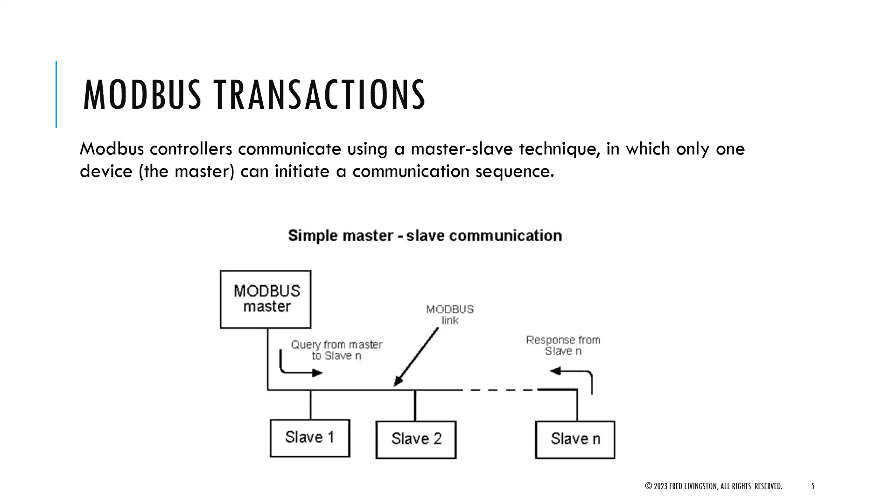And so the Modbus: single master, multiple slaves, and they have a fixed packet. You have the address, you have the function code. The function code, remember, does the read and the write. You can do read registers, write registers. Those are the different functions they have. Then you have your data itself, and all of these have error CRC bits to know that the data you sent didn't get corrupted over the network. So that's one advantage. And then an acknowledgement packet is always sent back corresponding to the query. So the query and response should have some of the similar data coming back.

In the labs, you discovered there are certain registers where these go. So if you add booleans, which is the single coil, they start with address 000 and then append from 1, 2, 3, and 4. And that's how you were able to set the inputs and outputs.

If you want to turn on a motor or stop a motor or look at a sensor IO, just a single boolean value if it's on or off, true or false, you can use the input coil there, and you could say force this thing on or force this off. But it's only a single bit. If you want to send more rich information, such as a string, a time, a status, you need to convert it to a 16-bit number.

And we talked about the conversion, and that allows you to send more rich information back and forth. And they're going to start at a different address though. They're going to start with the 3000s for integers and 4000 for the floating point numbers. But they're still 16-bit numbers, and you will have to typecast that into the correct format to actually use it.

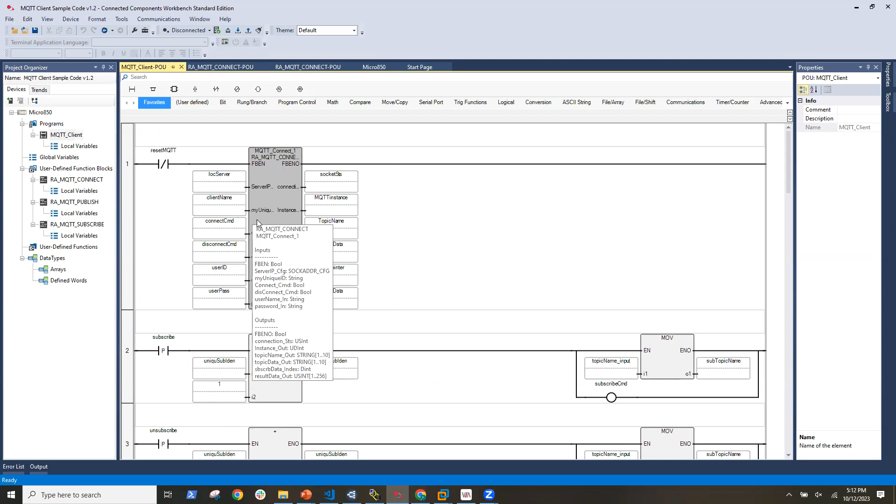Here is that enable. And I have global variables here for a lot of these inputs and outputs. So I could set these here. It's either local or global variables. I think they are pretty much all local in this case. And this is where I'm going to set some information here. And you need to set this before you actually connect to the device here.

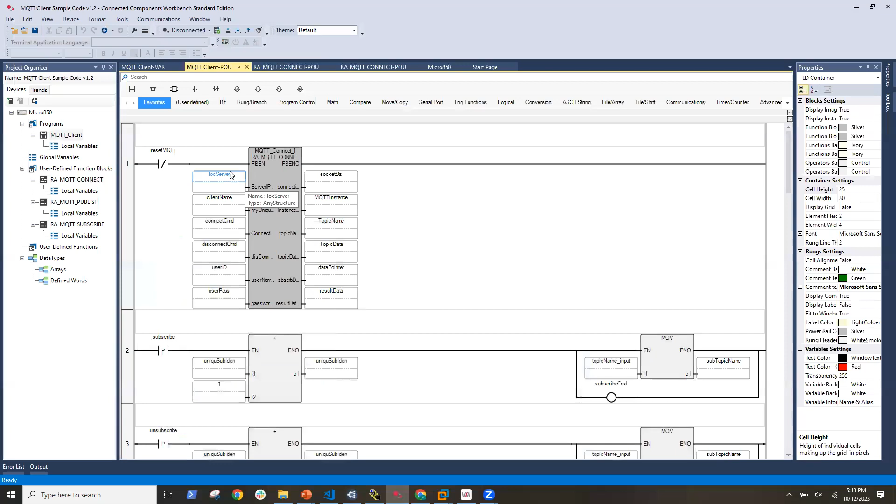So the first important thing that I had in red was we need to make sure the IP address is set to the broker, and we need to have this username that's kind of unique there. So this local server and this client name is set here and here. I want to be able to set this local variable to that. So that is a local server, which should be here. And you can see here's the port. We're going to use the default port. But this is where I need to set the IP address to my broker.

And if you don't know your IP to the broker, I just use a ping to figure that out. So if I want to connect to the test Mosquitto, is it Q-I-T-T-O? And I could ping it, and I can see it is 91.121. And that's what I want to put in here for my initial value. So this is 91.121.93.94. And it will change. It's not a static IP address. It probably changes every day or something. So it happens to be right. I just connected before coming down here today.

And I also want to have a unique client name. So we'll find that here, and you want to change that to whatever your client name is. As long as everyone's not using the same name, you will be okay here. So I just added some random numbers here to do that. And save this project. And I'm just going to connect to the PLC and upload it like normal.

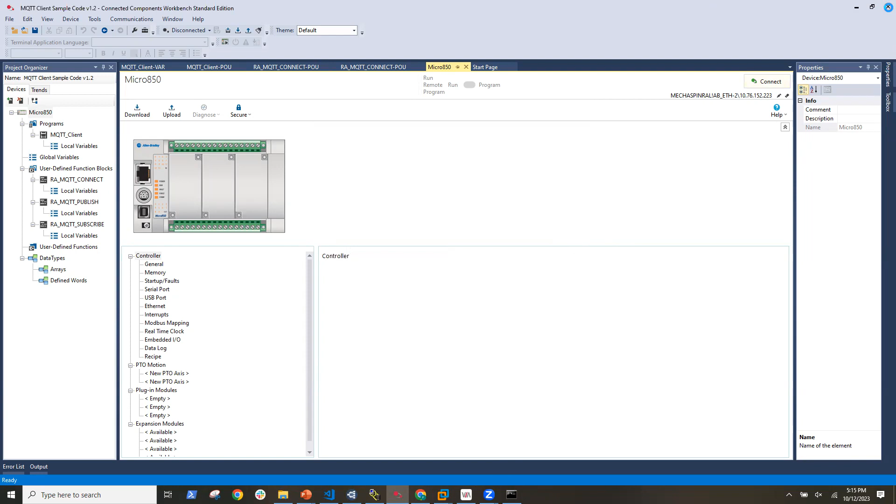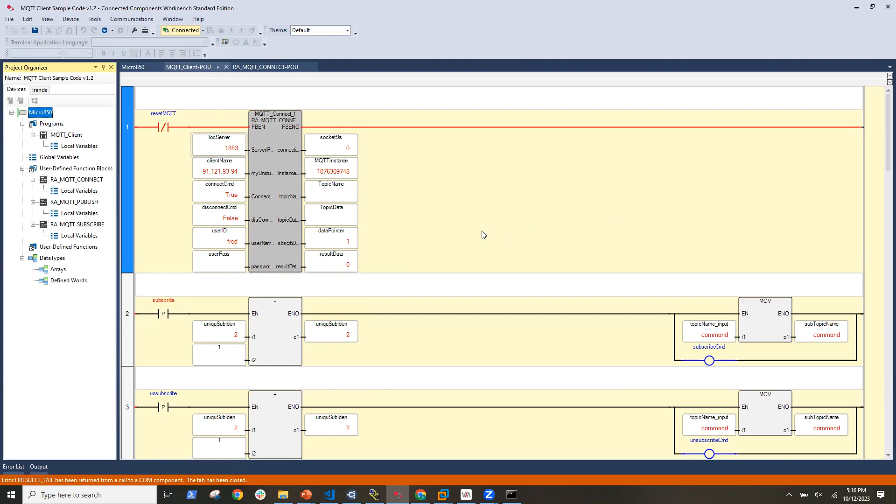Okay, so there you might get this out of sync error, which is good. This is going to actually synchronize the time from your computer clock to this here. And now we're connected to it, and we went to run there. And so if we haven't done this before, any of the coils, you could toggle those, force them by right clicking. And you can see you could toggle or use Control T to set that. So this block is connected because it's red and it's going all the way through. So this block is running.

But we see here, I need to actually send the connect command to the system. So I need to also toggle these values here. So it should be false, and then I want to toggle it true. And I should see my socket success go up. So it will not work unless success is equal to nine here. So that would be something you may run into later. So you may want to make sure this is false before and do a reset first.

And then run the connect command. And you'll see it's connected to, remember, a nine is a success. If you look through the documentation in here, and so that's what you need to. So I'm successfully connected to the public broker there.

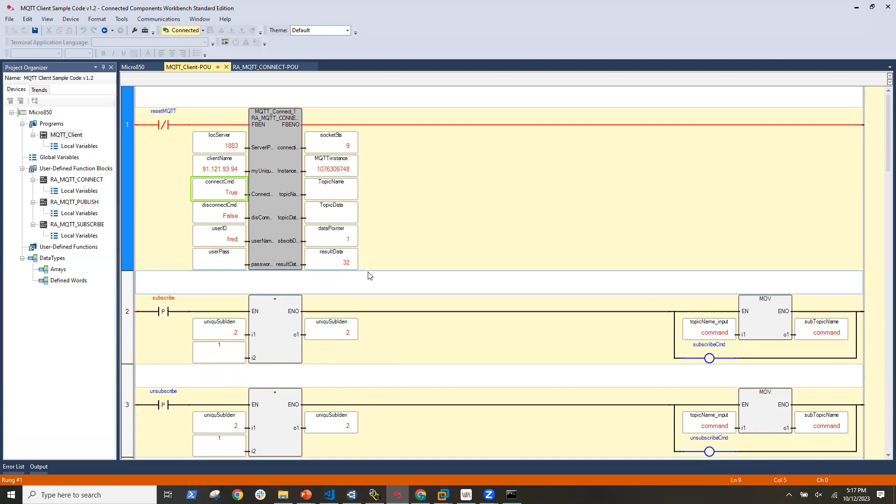And now, so I'm looking at this status here to do different things. I can subscribe, I can unsubscribe, I can also publish, but I'm always checking to see if that success is equal before enable. So if we don't have a nine, you'll not be able to do anything there.

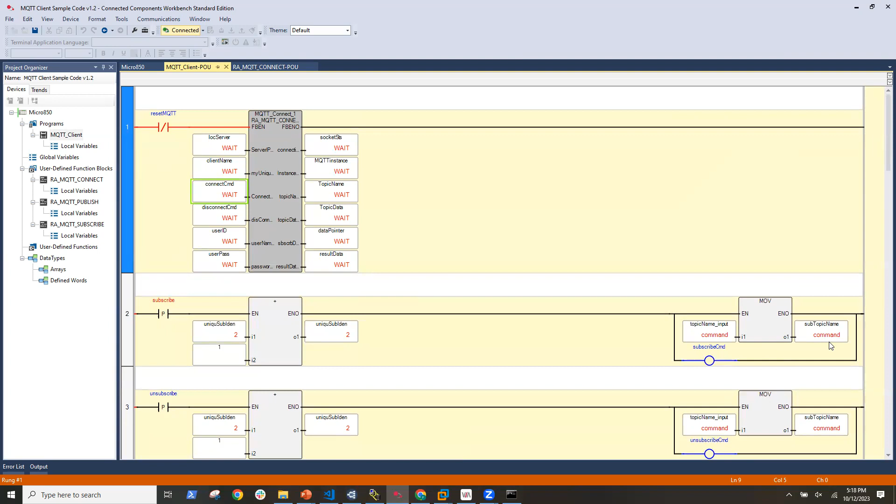So I just want to subscribe to a particular topic, and I'm going to look at this topic here. I want to subscribe to the command, and I'm going to move that into the command topic when I push it there. And then it's going to give me the value, the topic data is going to be located here.

So I'm going to connect to that particular system, and I'm going to send, I'm not using JSONs at the moment, I'm just sending the raw value command as the topic, and I'm going to send the command as an integer 8. And then I'm going to publish that to this broker at that particular IP address.

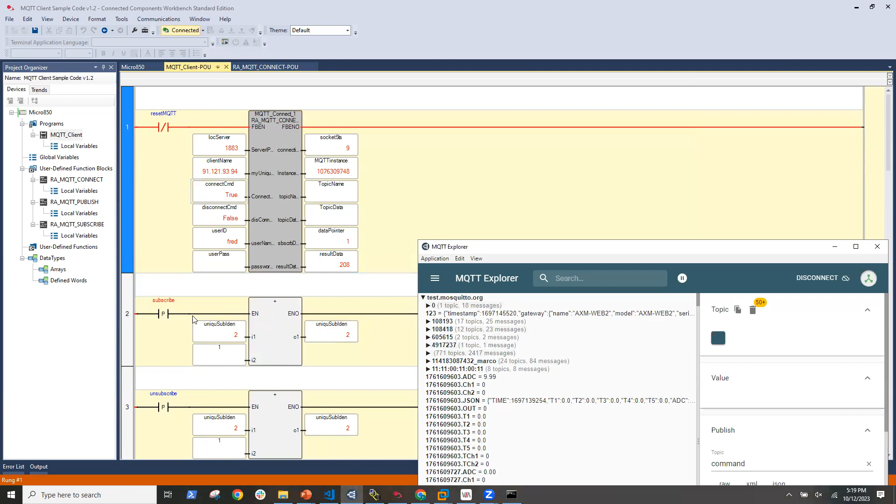And if I want to subscribe to it now, I can right click here, toggle, and it's going to subscribe to the command in a second. And we should eventually get the number back to the data. Let me toggle this off.

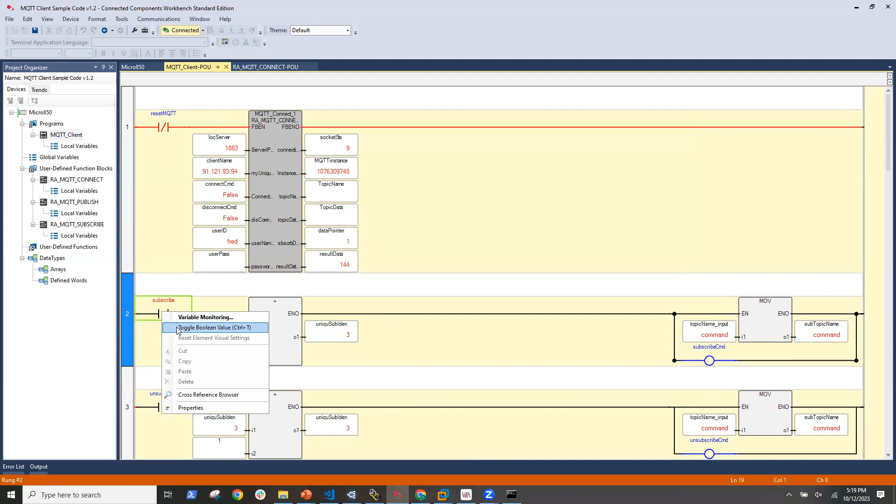And so in the lab, you would kind of debug that. I got a small thing I need to fix in here. But you're going to subscribe to the motor enable topic. And if that topic is equal to some value, you want to turn the motor on. And if that topic is equal to some other value, you want to turn the motor off. That's the goal, and you can use this as a starting point to complete that particular lab there.

And so it is a little bit tricky to get this working on this PLC because it's not default compatible with this. The better choice would be using the 870 series that has an MQTT block built right into it. And so in this example, Modbus would be a better example for this particular system, but we're trying to force the system to do MQTT by adding a user-defined block there. And it's capable of doing that, but it's not going to be as nice, as fancy as using some of the other systems there.

And so this is all reference for next week, but that is kind of the lab. You're going to actually use your phone, or you can use this app here, and you can still send the message to the cloud, and the cloud is going to send it back to the PLC, and it's going to toggle the motor on and off there. And you can take it to another level. You can build an iPhone app or whatever you want to do to control a PLC, or send data back to a server and do some data collection using MQTT.